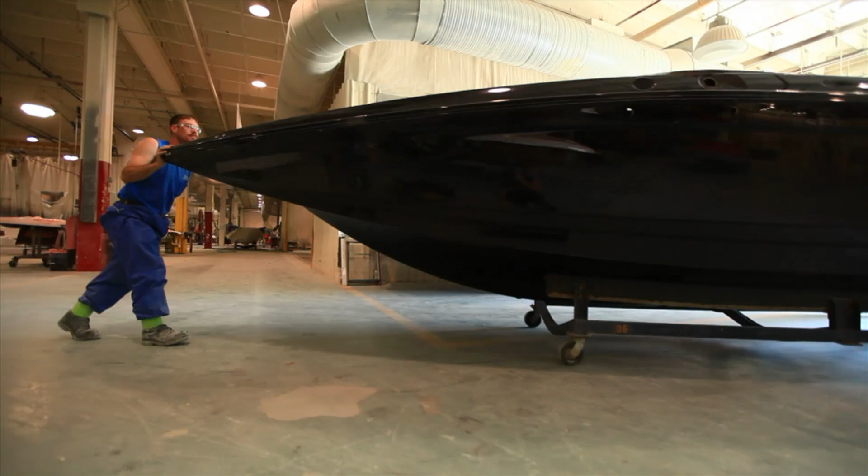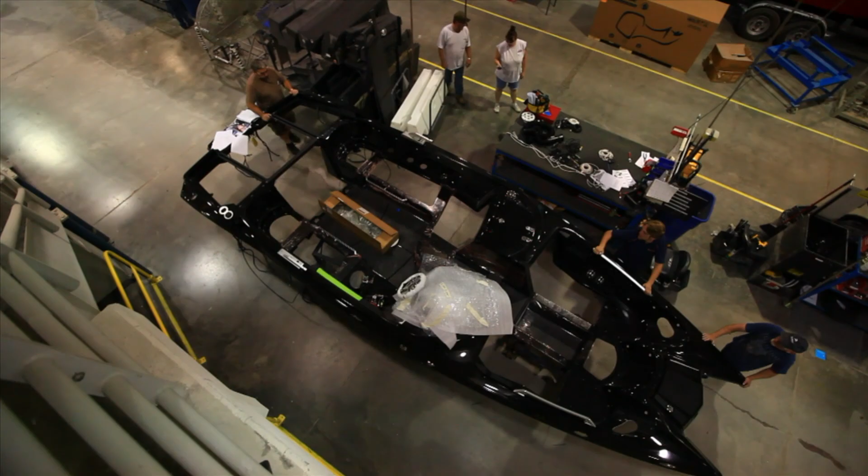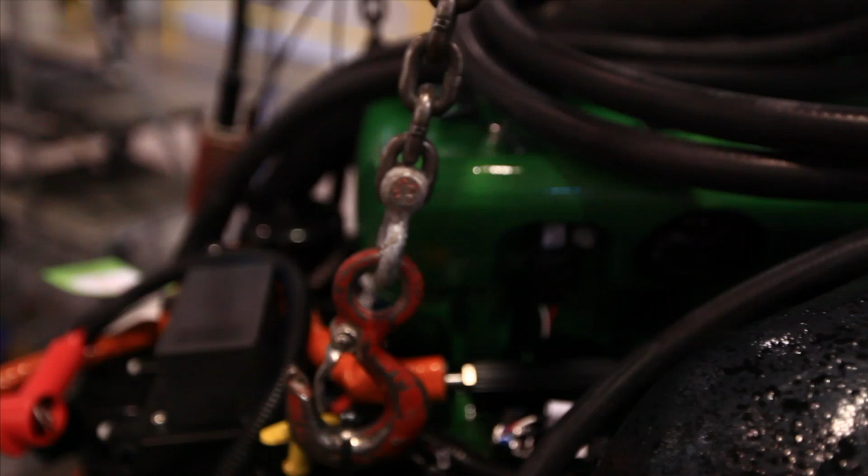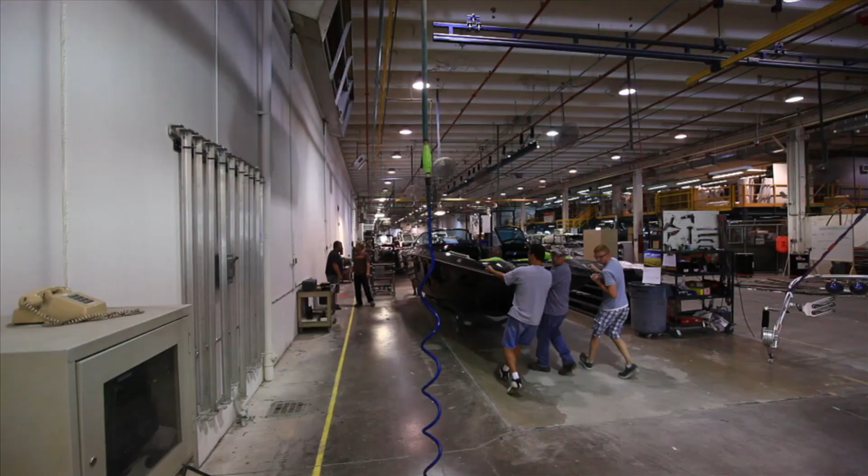And it's sick to see that Generation 4 is finally here. To think about what this boat has done for the sport, the importance of the XSTAR is so huge, because it has taken our sport, which often stalls out in progression, to new levels. Just all the tricks that have gone down behind the XSTAR is absolutely insane. To think about the progression of the sport behind this boat, I can't even imagine what G4 is going to bring, but I know it's going to be the next level of wakeboarding.

Everything in the MasterCraft family was STAR - Pro Star, Ameristar, etc. So we thought, well, the extreme sports, let's call this boat the XSTAR. So in fact we built two of them, one for Darren Shapiro and one for Jeremy Kovak. We said these would be great athlete boats, and more than anything, we were going to ultimately pull the X Games with them. We said, what if? What if we really build a boat and go after nothing but the ultimate wake shape?

It's the exact same thing we've done for years with the ProStar 190. In the ProStar 190, it was all about the smallest, cleanest, most symmetrical wake you could possibly have. With this, we said what if we went the complete opposite and tried to make the biggest, rampiest, cleanest wake out there in the business? The XSTAR was going to be something where we had to absolutely raise the bar, break the mold again, and make sure it was unlike anything else out there.

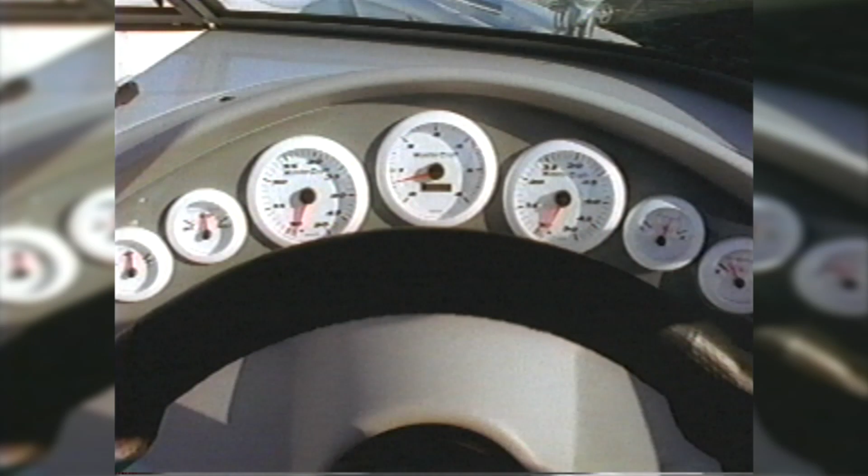When it comes to wakeboarding, the XSTAR by MasterCraft is engineered to perfection. Except for a few loose screws hanging from the end of the rope.

Well, we built these two boats in November, the year prior to the Summer X Games, and just took them to a dealer function. The boats were, at the time, a 205 direct drive. We had put a Fly High pylon on it and some Fat Sac ballast bags, which was leading edge technology back in 1996 and '97. And the boats looked so good that the dealers bought those two boats at the show. So I guess we got to go build a couple more.

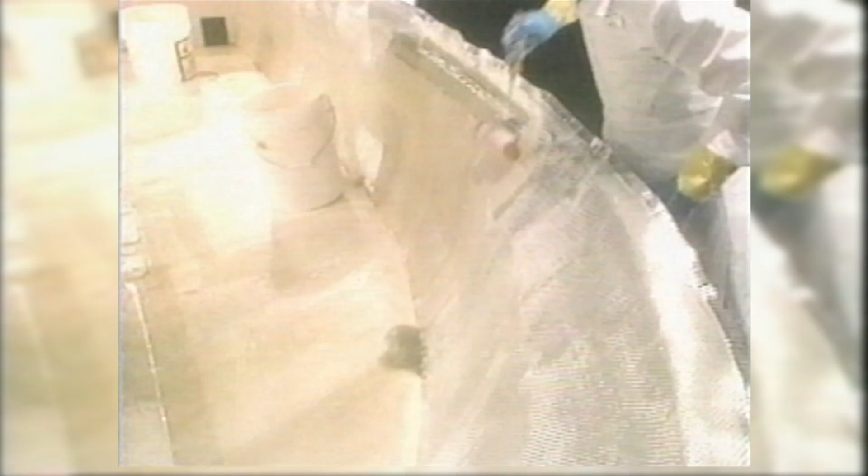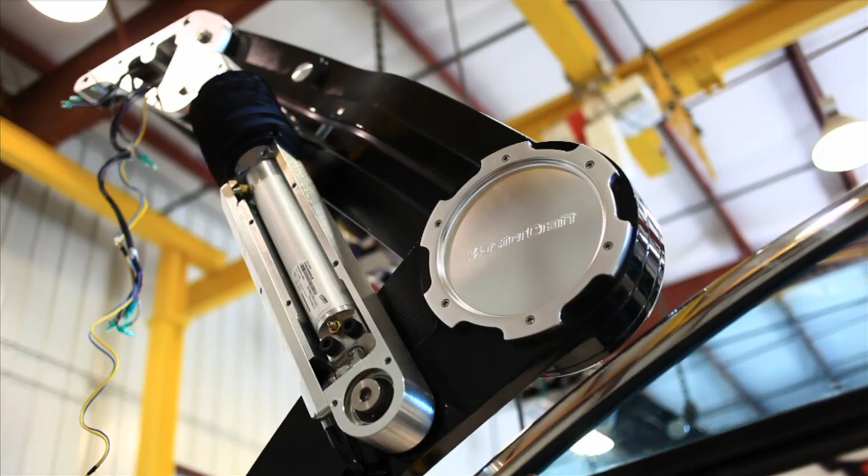We didn't really rest on our laurels, because even though the XSTAR didn't change for several years, it morphed every year into something different - to plug and play, to power towers, to Zero Off and different dashes, and now to a 7.4 liter engine.

And then come 2003, we blew them out of the water. Everybody either loved it or hated that pickle fork boat, but when they got behind that thing, holy cow. So it was always morphing so we could keep the sport growing and keep that wake getting bigger. And ultimately, what happened behind the boat was insane.

The athletes have progressed so much over the years. We have to continue to push them to higher levels, and they just demand more performance. So the boat has to continue to evolve. It has to be the ultimate wakeboard boat - that's the mission statement for that boat, and that just means it has to stay ahead of the market.

How do we improve it? This is already the wakeboard boat of the industry - how do we make it even better? It's kind of like chasing that unicorn. We have 13 different models of boats at MasterCraft, and 11 different running surfaces that we play with, that we look at and learn from.

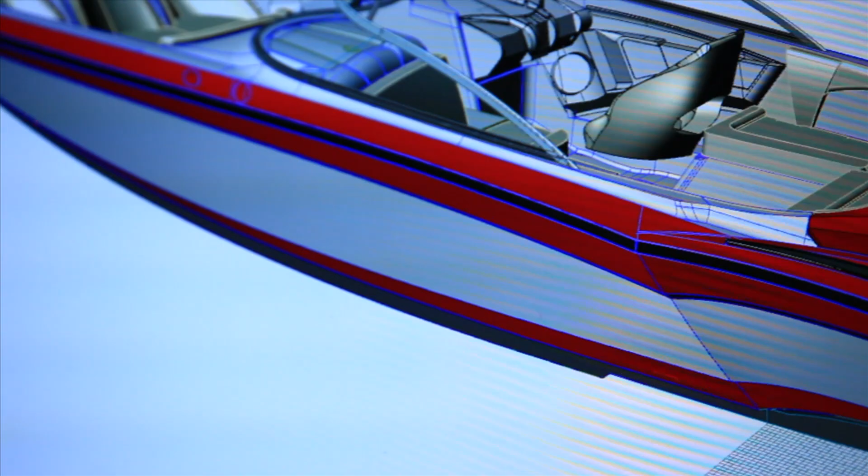They started off wanting a new look, a new style, and you see that in the longer pickle fork and the kind of bumped out sides. But that style is actually leading to functionality inside the boat, which is really where you make everybody happy. We sent the boat down to Florida with the engine moved back a little bit and some styling cues, and had Zane, Rusty, and all those guys run it, and they loved it. So we brought it back up, turned it upside down, and from then on it was 3D modeling, and just kept going.

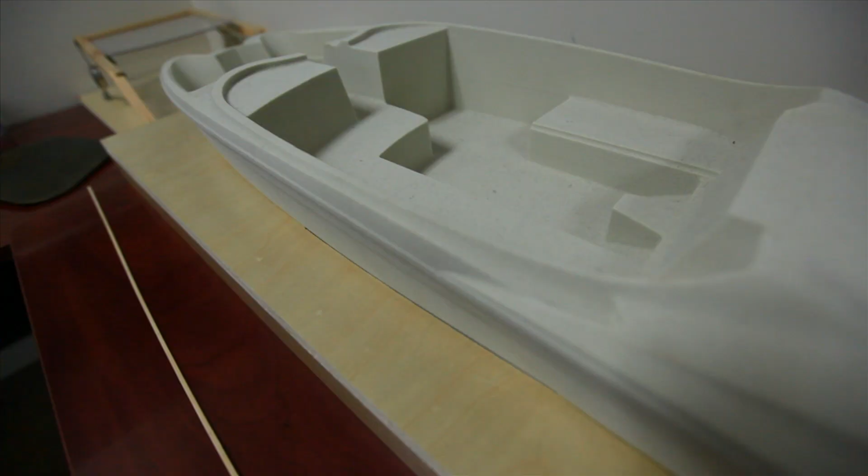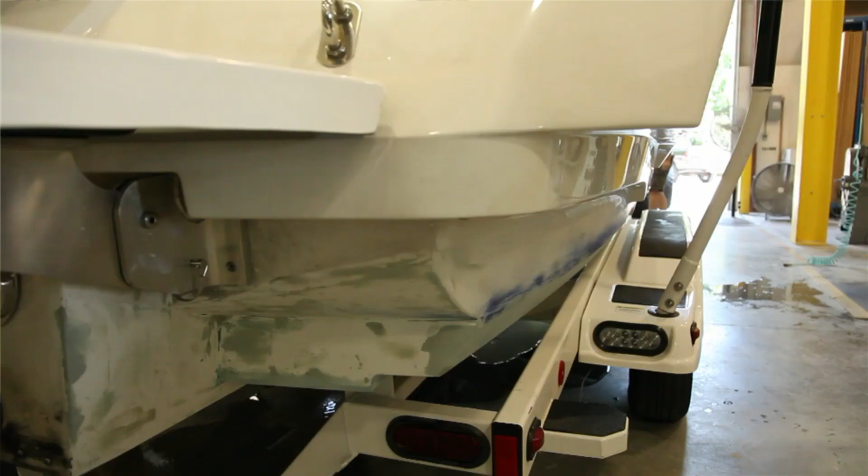It's crazy to understand just how many changes we've made to the bottom of the boat, why it's prevalent, what's really important about what things work and why they work, and what things they're doing to the wake and the bottom of the boat for performance, from fuel efficiency to time on plane to the wake shape.

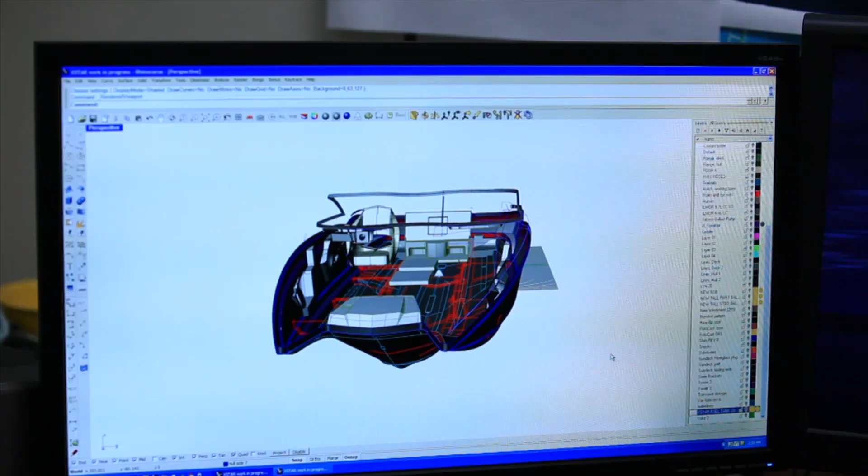We spent over 2 years focusing on the wake. While the engineers are working on this over here, the electrical guys are doing this, the art guys are drawing this, we were working on the wake.

They say bigger isn't always better. Well, they're wrong. Bigger is always better when you're wakeboarding, because the wake, it's insane how much this thing boosts you straight up.

That boat always has to be just a little ahead of the athletes, the top level riders, to let them know what this sport's capable of. That's what that boat's all about, the X-Star.

Well, today is July 27th. It's 7:51 in the morning. Heading into the MasterCraft factory for what I hope is the final day of testing on the X-Star.

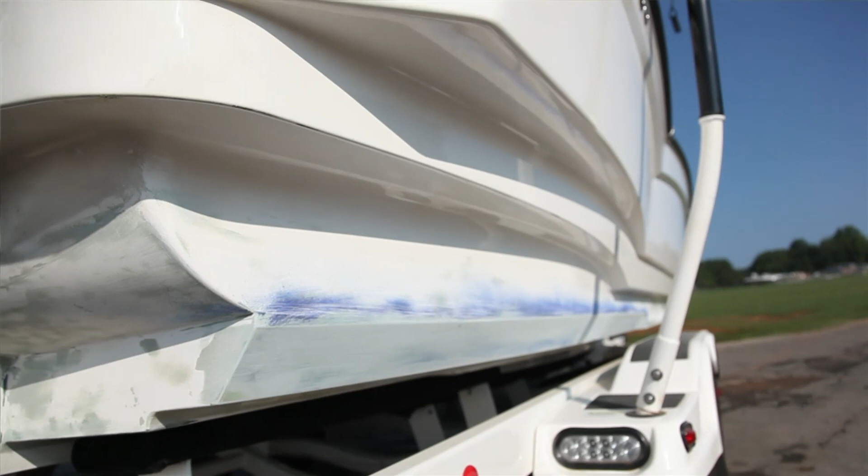Last week, Rusty and I came in. We got the wake like right where we want it. We had him do a few little tweaks. So today we're going to get out there.

We're going to look for symmetry in the wake. We're going to look for the lip to come together and be perfect at the line length I'm riding, Rusty's riding. We got Harley in last night, so today's the day, man. We're gonna make wakeboarding go bigger.

I distinctly remember testing day, the final testing day. We're all excited driving into the factory. We're excited because we want it to be right, we want it to be the best possible wake out there, and they're relying on us to give it the stamp of approval. I was here just a few days ago.

It was really close. It was like having basically a mini double-up every time you hit the wake. And for a guy like me, it's a dream come true. I'm really excited to get out there and see if we're perfect.

I'm gonna ride, I'm gonna make my assessment, keep it to myself. You're gonna ride, Russ is gonna ride. Keep everything to yourself till we all get in the boat and we go, alright, here's what I felt, here's what I felt, here's what I felt. I don't want you to be pressured to think anything differently.

I think we're up near there, for real. I feel like it's a little too lippy on port side. I didn't feel that it was too lippy, I just felt like there was a touch of wash that could be cleaned up.

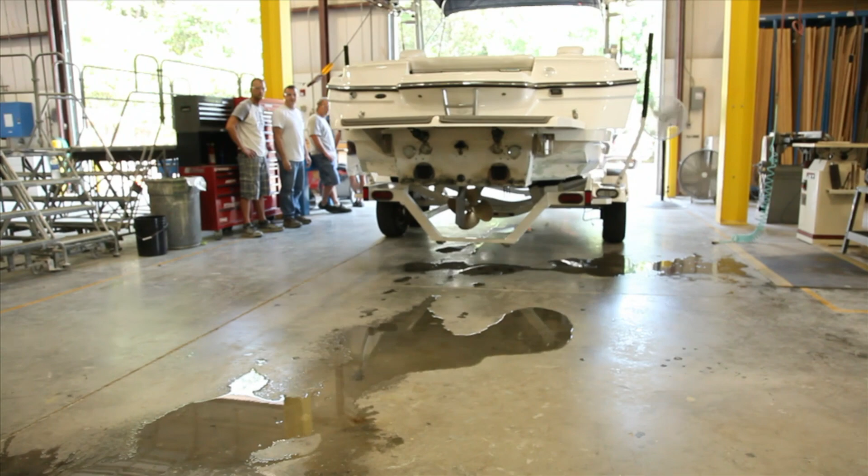Load it up on the trailer, get back on the tractor, hook it up, and we're going straight up to engineering. As soon as that thing comes in, it's getting strapped up, hoisted in the air. They put the cradles under it, and what you'd think takes a long time really doesn't—they slapped in a little hook on one side. These guys knocked out an awesome change in like 15, 20 minutes, did a little tweak on the bottom, and we're back in literally less than an hour. We're gonna see if we can dial this thing in.

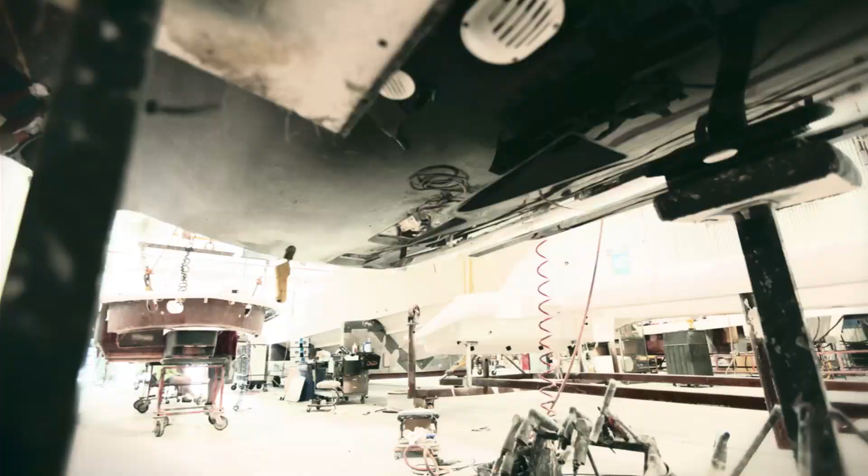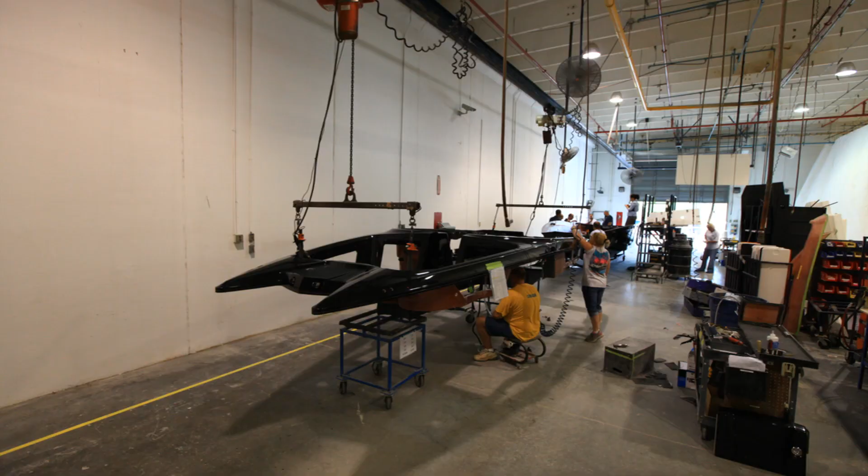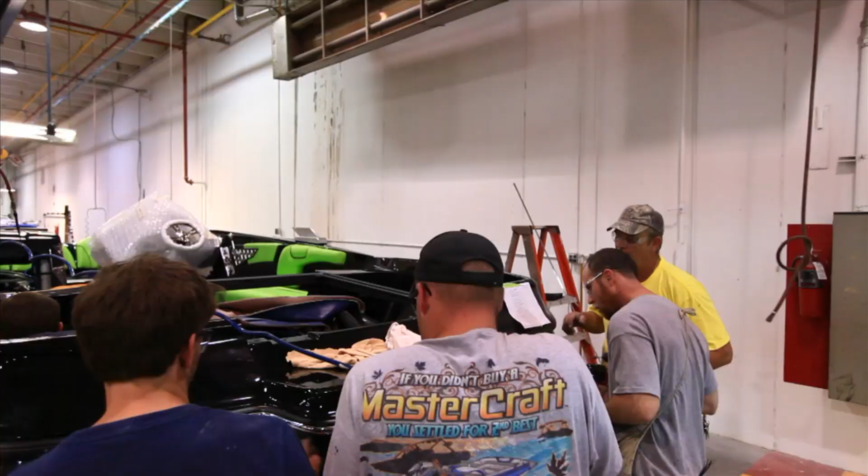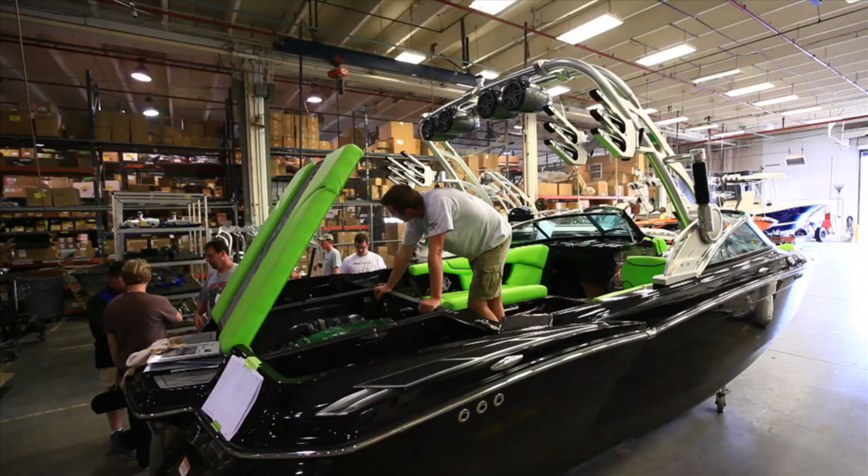And now the process begins. A boat is actually built from the outside in, so you start with the gel coat first. Building number 2 is where the assembly happens, and through this whole assembly line process you continue to add on different parts and pieces. Then we move into the interior section where they start to install the rub rails, interiors, and towers. The last stage is the lake test, and we got a guy, Robin, who goes down and takes every boat out. He runs the ballast pumps, the cruise control, checks steering—just everything in the whole boat.

So here we are, Generation 4 of the XSTAR. Each generation has been a significant leap, both for that boat and for the entire industry. You don't do that by just getting lucky—we got the best riders, the best people, and a burning passion to deliver the world's greatest wake boat. That's what Gen 4 XSTAR is all about.

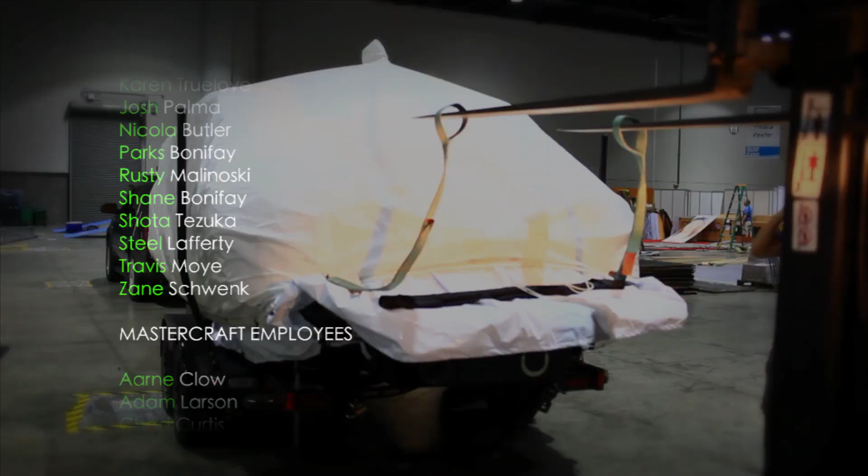Loading the boat right now, trying to get ready for the big event.

Thursday, we're going to have a guy paint the big crate that we're going to have around it. Friday, 10 a.m. is the big unveiling. Then Saturday all day, people are going to be getting in and out of it, checking it out.

I think they like it.